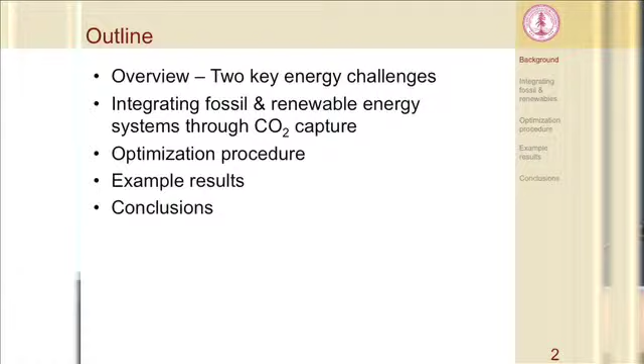So for an overview, I'll talk a little bit about what I think of as the two key energy challenges facing the electricity system over the next half century or so. Again, this is kind of a 2050 time frame, not necessarily next year. I'll then talk about our concept of integrating fossil and renewable energy systems together, ideally, as we think, to make a system that works better than it would otherwise if you didn't integrate these two systems together. I'll talk a little bit about the optimization model that Charles has built, and he can answer more detailed questions about that. I'll show some example results, and then we'll wrap up with some conclusions.

As far as I can tell, being a reasonably informed observer of the electricity system, I think there are two challenges facing electricity over the next half century. The first one is reducing greenhouse gas emissions from existing power plants. The capital intensity of investment in the electricity system and the scales of investment required are such that it really is a decades-long problem.

Perhaps the right way to think about this is that in order to build a large coal-fired power plant, like many that have been built in the developing world over the last 10 years, you're talking investment on the scale of billions of dollars. And the commonplace way to think about it is these come with a large mortgage, right? A mortgage that is decades long. And actually this long operation lifetime is required to pay off the plants. It's a fundamental part of the economics of the plants.

So it's actually extremely difficult economically to just say we're going to turn off these coal-fired power plants. Older ones, that will likely make sense. Newer ones, that's very difficult. And for this reason, many power plants operating today, particularly in other countries, have economic operating lifetimes of decades. And so the first challenge is addressing greenhouse gas emissions from this inertial built stock that we've got in the system that's going to take a very long time to filter its way through the system.

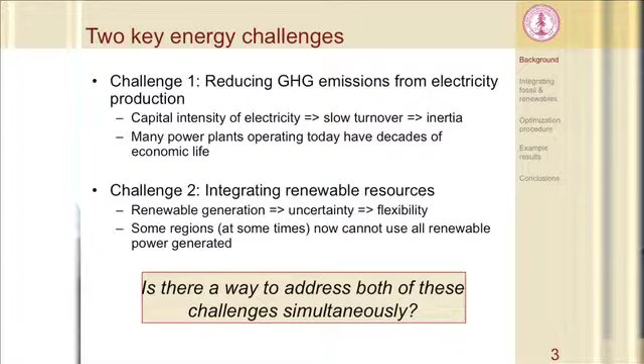This requires you to have a little bit more flexibility about how you operate the grid. With the result now that some regions at some times currently can't use all the wind power that's generated, so the wind power has to be spilled. And so this is an issue as the penetration of renewables grows. This will likely become a larger issue.

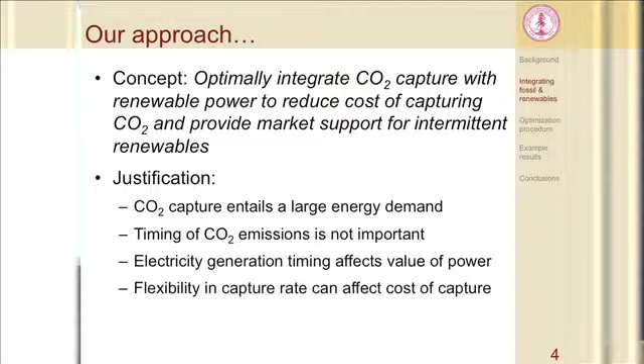So our question is: is there a way to address both of these big challenges over the next century simultaneously? Our concept here is to optimally integrate CO2 capture with renewable power such that we can reduce the overall cost of capturing CO2, that is, make it cheaper to mitigate the climate damage, while also providing support for renewable systems. The justification here is that CO2 capture is quite energy intensive. We're talking on order a third of the energy content of the primary fuel.

Secondarily, the timing of CO2 emissions is not important, right? So while the timing of electricity inputs and withdrawals from the grid is very important on a minute-to-minute time scale and even shorter, the atmosphere doesn't care so much if the emissions happen on Monday or on Tuesday, as long as averaged over the course of whatever time period you're concerned about, you reach a target.

And so we think that flexibility in the capture rate can affect the cost of CO2 capture. And so our couple ways of thinking about the general concept is that the ideal CO2 capture system operates in a totally flexible manner, such that the costs of CO2 are minimized by only capturing CO2 when it's cheapest to do so, right? So you push essentially all the CO2 capture to time periods when it's least burdensome to capture the CO2.

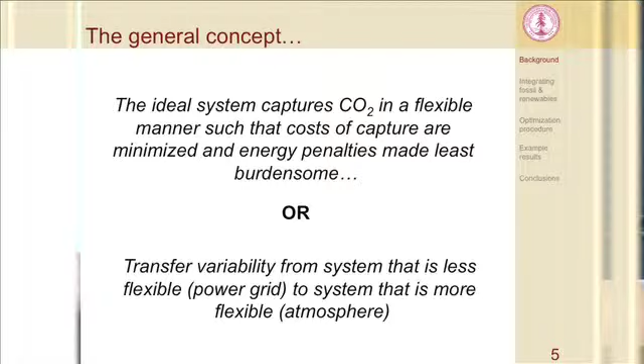Obviously, there are trade-offs, and we'll talk about that: by building in this variability, you actually increase the cost of the system, so you can only go so far. But ideally, your CO2 capture would be this sort of variable sponge that as the effective cost of capture increases and decreases, you're capturing more or less.

Another way to think about this is that we're trying to transfer variability from a system that's very intolerant to variability or unpredictability, that's the electricity grid, to a system that is very buffered over human timescales, weekly, monthly, seasonal cycles. And that's the atmosphere, right? And so we're playing off that degree of flexibility.

We're looking at trying to meet two standards in this research. So these act as constraints in our system. The first one is that California requires, as of a couple of years ago, that any long-term power purchase contracts for supplying power to the state of California have a CO2 intensity less than or equal to 500 kilograms per megawatt hour. This is on order like a natural gas plant. And so obviously with a coal-fired power plant, you're gonna have to capture the CO2. That amounts to about half the CO2 intensity of a normal coal-fired power plant.

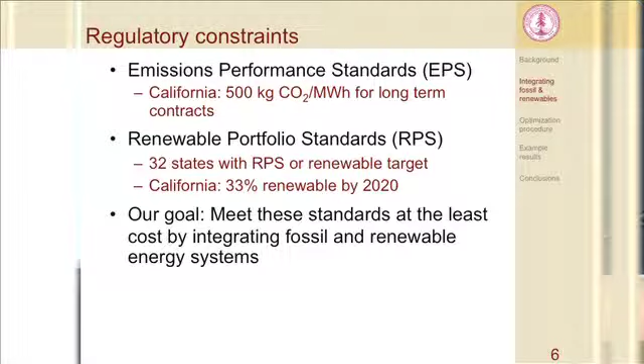The other standard is a renewable portfolio standard. California has a 33% renewable target by 2020. And so our goal is to move forward and help try and meet both of these standards at once.

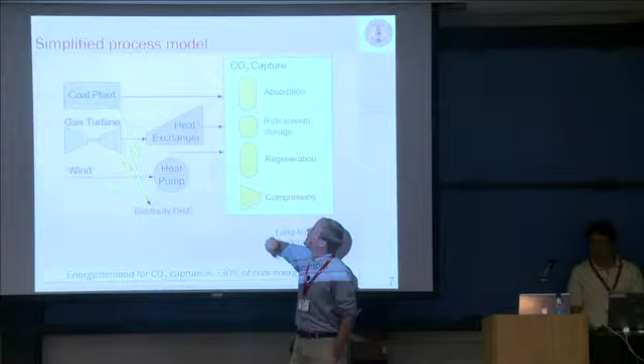Here's a simple diagram of our system. We've got a coal-fired power plant at the top that's sending electricity, our lightning bolt here, out to the grid, and then we're also sending flue gas to this box here, which is the CO2 capture system. Supplementary to that, we have a gas turbine; it's quite flexible. You can ramp it up and down. That's combined with a heat exchanger that generates steam that's used to regenerate the CO2 capture system.

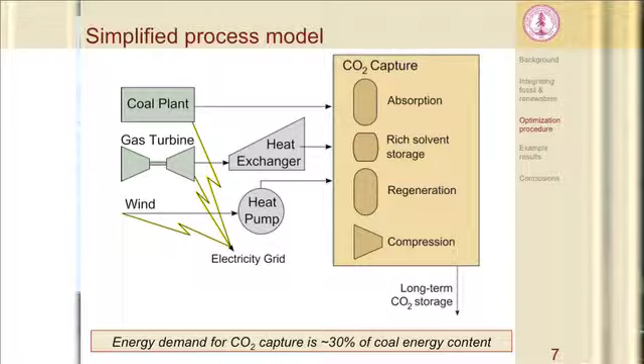We also have the possibility to integrate wind into the system, either by directly selling it to the grid as part of what we're calling a blend, so that you would build a certain amount of wind turbines along with your coal-fired power plant to essentially get your aggregate CO2 intensity down. Or you can send wind to either a heat pump or a direct electricity to heat system to generate heat at certain times. And I'll talk about when you might want to do that.

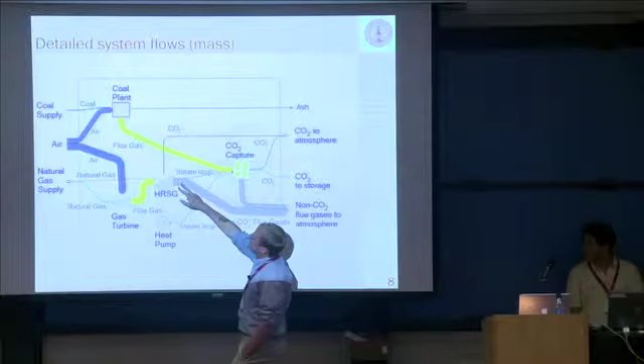This is a more detailed mass flow diagram of one instantaneous snapshot of where the mass is going in the system. And so you can see here that mass goes from the coal plant to the CO2 capture unit. Flue gas goes to what's called a heat recovery steam generator to generate steam, et cetera. So that's kind of the level of detail at which we're modeling things.

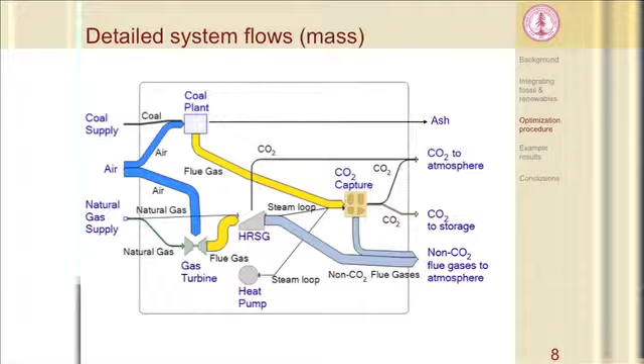The optimization framework in which we're operating requires that the model be fairly simple. It needs to be solved many thousands of times in order to optimize, and so you face a definite trade-off in these problems between increasing model complexity and the ability to get a stable, robust solution. And so it's relatively simple.

Our objective function, so if you want to optimize, you need an objective function. This is basically something you're trying to maximize or minimize. Our objective function is to maximize the daily operating profit of the system, which we're taking to be the value of the power sales, that is the value of the electricity you sell onto the grid, minus the fuel costs, how much you have to spend to purchase coal and natural gas.

We don't currently include capital costs. That's what Charles has started working on a little bit this summer, and the next year or so is going to be integrating capital costs into the model.

Our decision variables: every optimization model has decision variables, so if you're trying to maximize or minimize your objective function, the decision variable says, what do I have control over? So if I'm trying to maximize operating profit, what can I actually change in order to choose an optimal setup? We can turn the gas turbine up and down, so you generate more and less electricity and more and less heat using that.

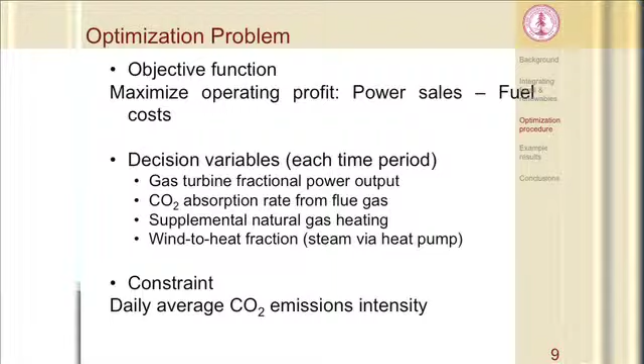You can change the CO2 absorption rate from the flue gas. You can use supplemental natural gas heating, and then we can, as I said, take wind power to heat. And we'll talk about that actually in a second.

The business model that we're modeling is actually a Wyoming to California energy sales scheme. And so the idea is that there's a lot of coal power in Wyoming. There's a number of coal-fired power plants in Wyoming. There's also a lot of wind in Wyoming. And so the idea here is to blend these together and ship a low greenhouse gas blend to California.

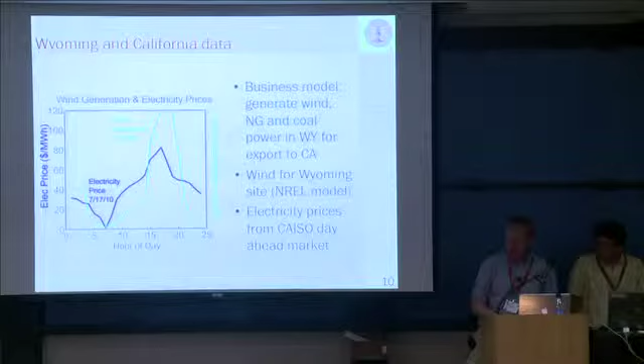So we're using California electricity prices here in blue, along with Wyoming wind generation in green, and this is a sample day. So you can see here that these vary quite a lot. The electricity price in the middle of the morning at say 6 or 7 a.m. is very low. Wind power peaks in the evening.

If you're imagining this, what we're calling our sort of heuristic base case, if you're imagining this combustion turbine like a normal, what's called a peaker plant, that is a gas turbine that comes on and off during the day, you might have a price threshold. And so let's say here our profit threshold is about $60 per megawatt hour. At that point, the CO2 capture rate, or the gas turbine partial loading is turned up.

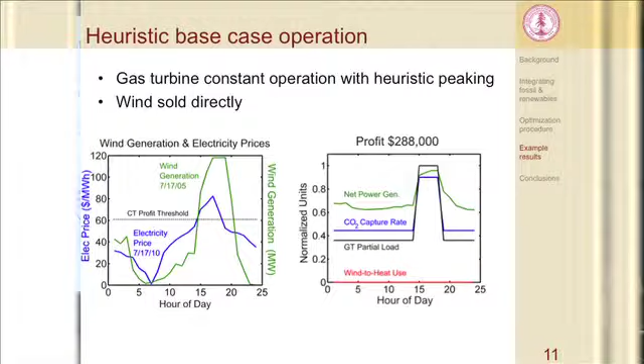That allows you to instantaneously capture more CO2 far above this sort of background level that's performed at all the other times. And so this heuristic rule is capture a minimal amount of CO2 during the rest of the day, and then when it's profitable to run the gas turbine, turn the gas turbine all the way up and capture the rest of the CO2 that you need to meet the standard at that time. That's sort of our base unoptimized case.

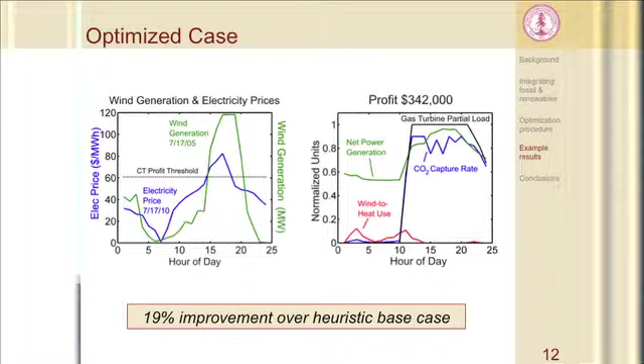Our optimized case, this is the same left-hand side here, our input of electricity price and wind power, operates very differently. You can see here that the gas turbine is turned off in the middle of the night. The CO2 capture is turned off in the middle of the night. So basically, because there's no value to the power that you sell, that you sort of co-generate along with the captured CO2, why would you capture CO2 in the middle of the night, right?

If you have a parasitic case where you're sort of taking energy off of the system, which is sort of the alternate modified system for capturing CO2, then you would not want to capture during the day when we need the power and capture it all at night, okay?

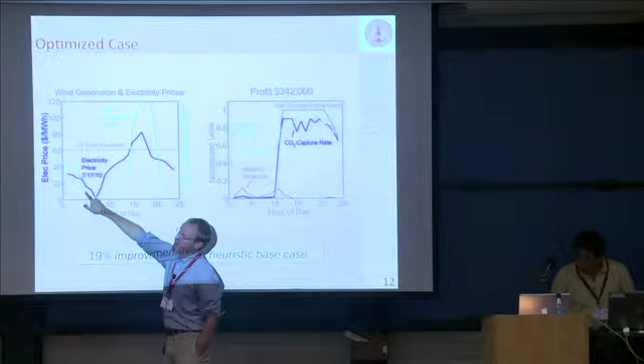You can see here also at times where the electricity price is very low and we still have some wind power, it actually makes sense to basically suck this wind into the system that's not worth very much on the grid in order to capture the CO2. So in essence, we're sort of storing some of this wind power in the middle of the night by capturing extra CO2 during the night. That enables us to capture a little bit less during the day.

What we're finding is that the mean improvement over all model days is about 18% in the daily operating profit. And so basically you can significantly reduce the economic penalty, not necessarily the energy cost, but the economic penalty of CO2 capture by basically shifting when you do it and integrating it with renewables. This is on orders similar to what's been found by a variety of researchers from the UK and from University of Texas and other people who are looking at similar sorts of systems.

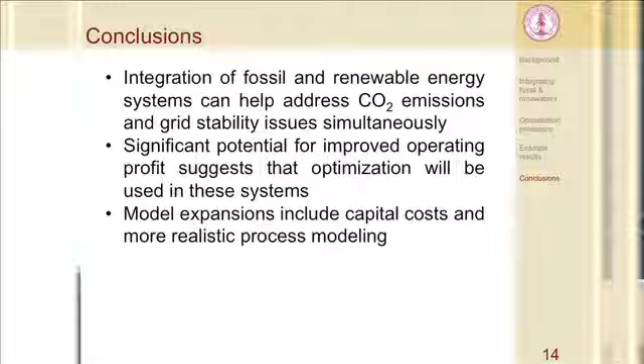We think that the significant benefit that we're seeing for optimization suggests that there's enough room here to where we should explore it further. If you only see 3 or 4% benefit, then maybe you don't go further. But we're seeing significant benefits, so we're gonna continue with the research. And then we're moving forward with capital cost estimation and more realistic process modeling.